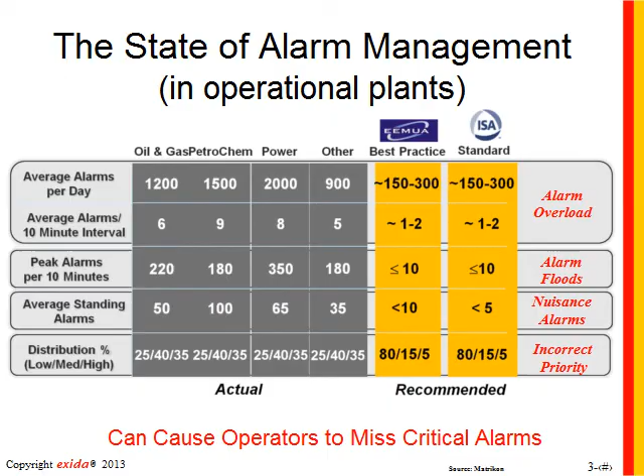And of course, with all of these problems in play, it can lead to operators missing critical alarms, which can result in unplanned downtime, damage to equipment, people being hurt, off-spec product, and in worst cases, accidents. We really do believe that alarm management and process safety go hand in hand. One of the purposes of the alarm system is to help keep the plant and personnel safe, in addition to helping you optimize the process.

Alarms are typically one of the first layers of protection - the alarm and the operator response to the alarm - used in conjunction with a safety instrumented system and with other IPLs, passive IPLs. One of the things that has been found through investigation of some of the worst case process safety accidents, things that have been in the news for a long time recently and in the far past, is that poor alarm management was a common theme and a significant contributor in each of these process safety accidents.

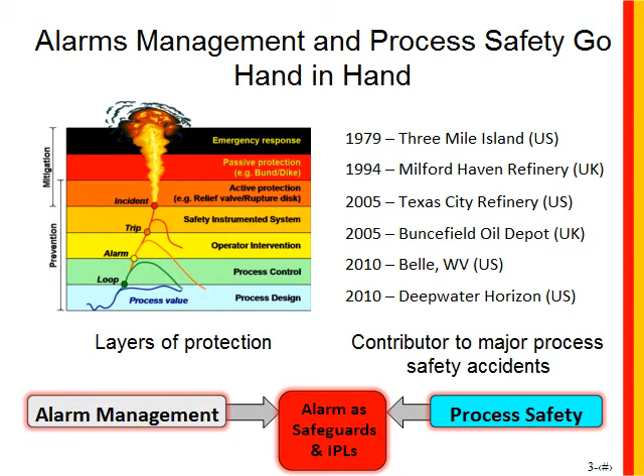So we really do think that alarm management and process safety work together, and that becomes particularly true when we talk about alarms that are part of the safety design - that is, alarms identified as safeguards in a HAZOP or a PHA, and alarms identified as independent protection layers in a layer of protection analysis.

So let's take a look at one of those accidents that was listed and see how alarm management played a part in it. Deepwater Horizon is something that probably everyone, or I would hope everyone, is familiar with - most familiar with the element related to the spilling of oil from the Macondo well blowout in the Gulf of Mexico.

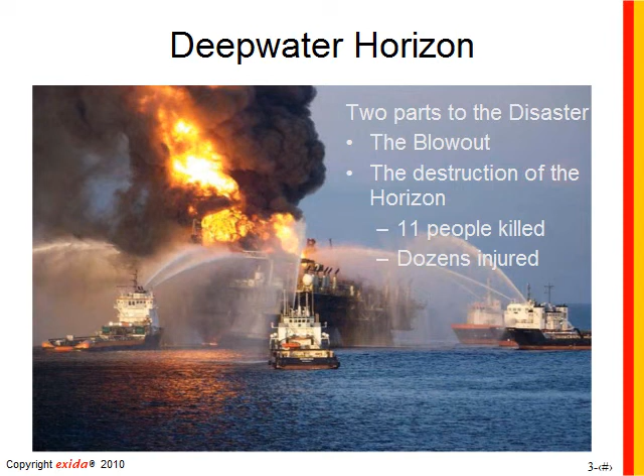What's probably not quite as well known is what happened to the platform itself, the destruction of the Horizon platform, and the causes of what went behind the design there, and why 11 people lost their lives and multiple other people were injured. So let's take a look at the design of the alarm system on the Horizon.

There were numerous tens of sensors placed all around the platform with the design intent that if any one of them detected the presence of gas or fire, it would alarm in the places where people were: 3 different places, the bridge, the drill shack, and the engine control room. It would also automatically sound a really loud horn to tell everyone that they needed to evacuate the rig. That was the design, the intent of the alarm system design there.

But the way it was actually implemented was different. They were concerned about false alarms or nuisance alarms in the middle of the night, waking people up and telling them to evacuate when they didn't really need to. So with that concern, they decided to disable or inhibit some of the alarm annunciation, putting the decision about whether to hit the evacuation horn into the hands of the bridge operator. If the sensors detected gas or fire, the alarm would only go off to the bridge operator, and it was up to them to decide whether the evacuation horn should be pressed.

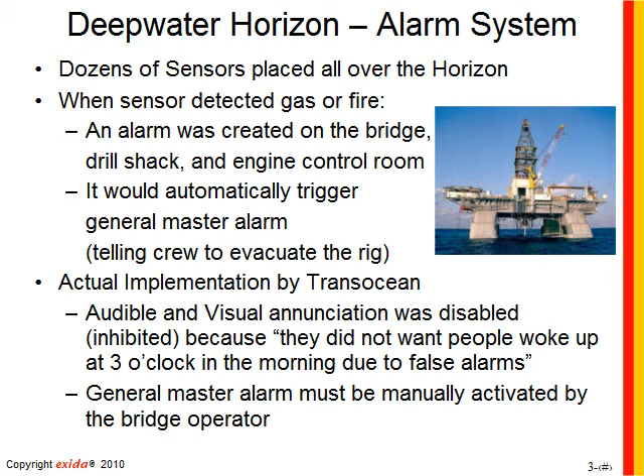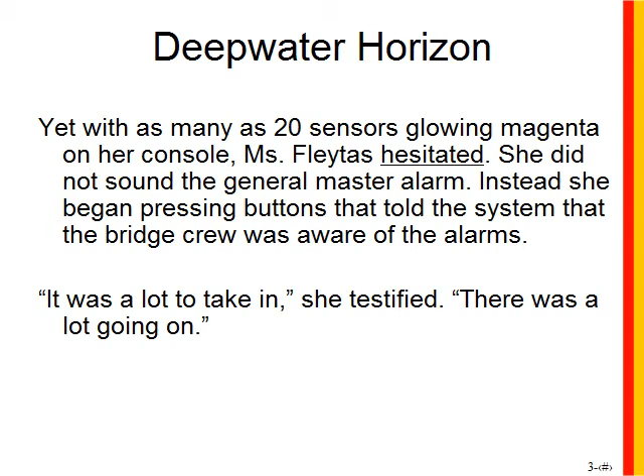Now you can read for yourself information that comes from the testimony before U.S. Congress. This was the actual operator that was on the console at the time, and you can see that she was somewhat overwhelmed by all of the alarms coming in at once, not knowing what to do. She wasn't there by herself, though. She was also joined by her supervisor, who also was having difficulty understanding what to do. The alarm annunciation was making it difficult. The overload of alarms was making it difficult for them to think and determine a course of action.

And of course, remember, it was up to the bridge operators to make the decision about whether to sound the evacuation horn. Unfortunately, there was a delay of about 10 minutes between when the sensors first detected the gas and fire to when that evacuation horn went off. I have to believe that contributed to the number of people that lost their lives or were injured in that accident. So directly, the effect of poor alarm management.

So how did we get into this situation with too many alarms, alarm overload, people not knowing how to respond when they get hit with so many alarms? If we think back to the olden days in panel board control rooms, there was actually limited real estate, limited room for alarms. So maybe for a given unit, you might get 200 alarms. That was all there was space for. So the engineers designing the alarm system had to pick the best 200 alarms. They had to do their due diligence because they only got 200 alarms. So they really had to optimize and trade off and think about what the purpose of each alarm was and what the operator was going to do.

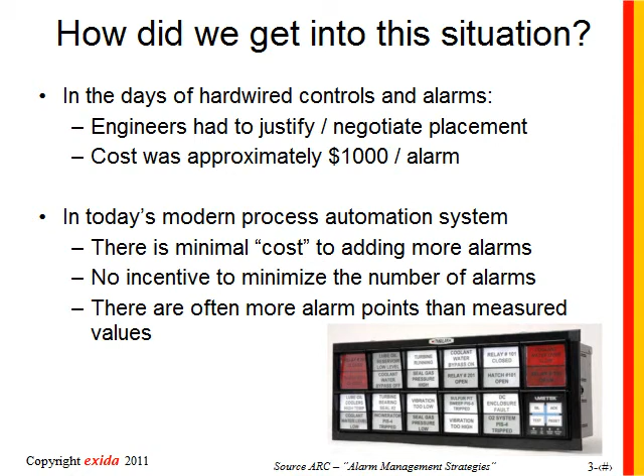So one of the things we want to do is get back to the thought process we used to use, where we thought about whether the alarm was really needed, what its purpose was, what the operator was to do. That's a process called alarm rationalization, which we'll talk about some during this webinar.

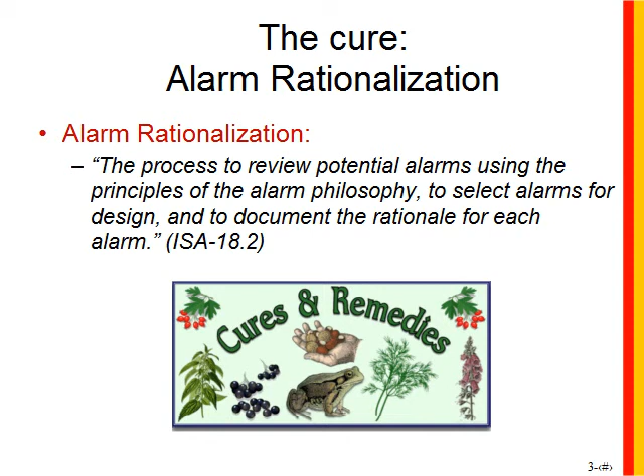So you're essentially starting up a system without a well-designed or well-thought-out alarm system. No wonder operators get inundated with alarms. If the system hasn't received any rationalization before starting up, that's exactly what would happen.

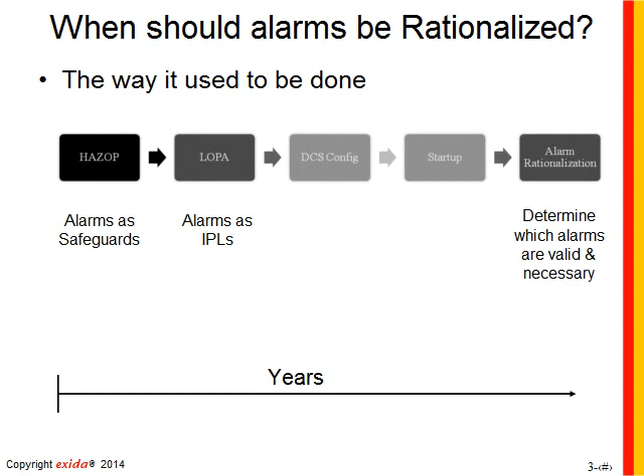One of the questions I wanted to ask as a poll is, how often have you found that an alarm which was identified as an IPL was not valid or ineffective? The idea being that since alarms are identified as safeguards and IPLs early in the project and not rationalized till after the system has been running for a while, it's possible that when you finally get around to rationalization, you might find that some alarms identified as safeguards or IPLs don't work or don't provide the risk reduction. So how often in your experience have you seen that happen?

We're getting a few responses. Give another couple of seconds. As soon as the results have flattened out, I'll make it so you can see them now.

You can see over 65% of the respondents said that sometimes or frequently they find an alarm that's an IPL turns out to be not valid or ineffective. Part of the reason that occurs is because of that huge time discontinuity we just saw. So one of the things we want to talk about for rationalization of greenfields is how to prevent that.

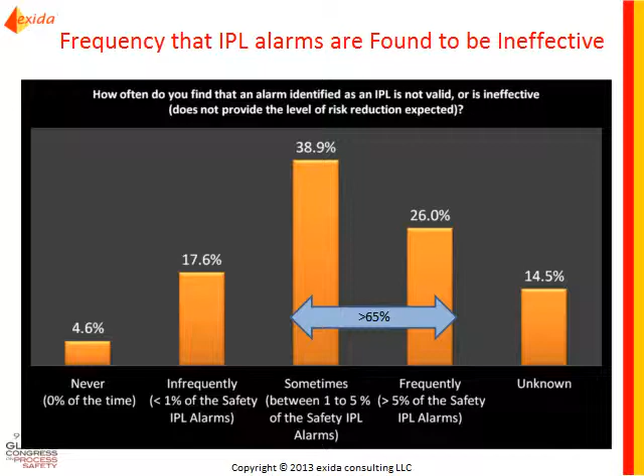What does that mean? If you're counting on your alarms to be part of your risk reduction strategy, the fact that they're not working or not pulling their weight in terms of risk reduction means you'll need to make up that loss by increasing or adding other IPLs, or increasing effectiveness, like your safety instrumented system, changing it from a SIL 1 maybe to a SIL 2, which of course has cost impact, maintenance and testing impact.

That's if you realize and know that's happening. If you don't realize your alarms aren't doing what they're supposed to from a risk reduction point of view, you may actually be operating with an actual risk greater than your tolerable risk, which would not be a good thing. That's part of what we want to discuss and address.

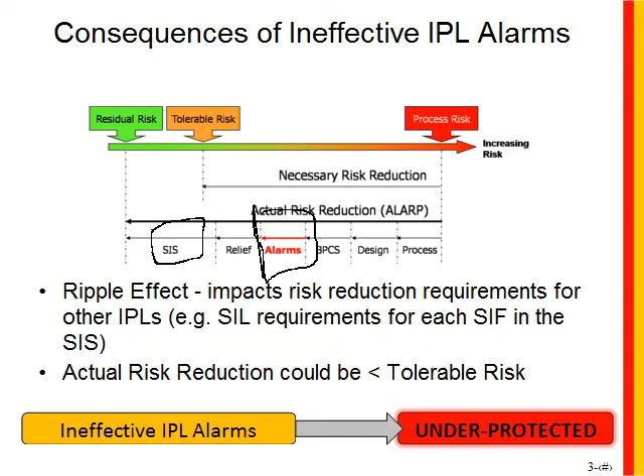So if the typical time to rationalize alarms is months or years after the system has been up and running, and operators are complaining about alarm system performance, and if that doesn't work, how should we do it differently? What could be different? Well, the end users of today have gotten smart to that situation and said, we no longer think it's acceptable to start up a system without the alarm system being rationalized.

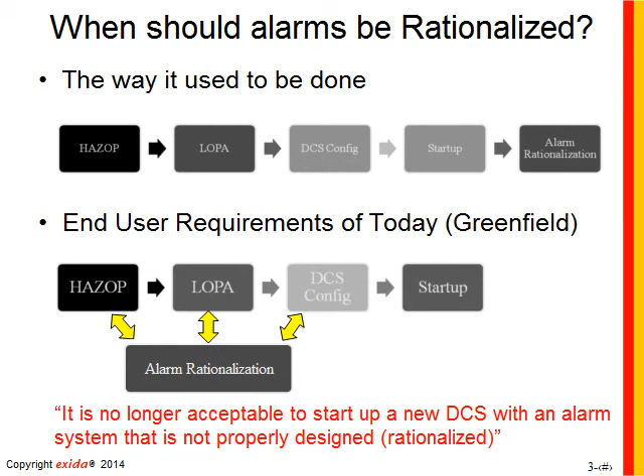Without the alarm system being configured appropriately, rationalization has to take place before startup, likely in parallel or in iteration with your HAZOPs, your LOPAs, and your DCS configuration. So that's part of what we want to talk about.

Where should the information come from regarding what we do for alarm management practice and principles? There's two main sources of information for that. There's the EEMUA 191 guideline that was created originally in 1999 in response to an accident in the UK. It just came out in its third edition in September 2013. And then there's also the ISA 18.2 standard created in the US in June of 2009.

This is actually a true auditable standard with requirements and recommendations that you clearly need to look at and address how you're going to comply with, because OSHA deems this document as recommended and generally accepted good engineering practice. So it's RAGAGEP - that means they expect you to follow this as good engineering practice. If they were to audit you and you're not following the standard, you could be in line for some fines or action.

This document was also given to the IEC, the International Standards Creation Board, to become an international standard, and it's on track for that to happen sometime later this year or next year, with the idea that the international version of the alarm management standard will be largely based on the original ISA 18.2 standard. One of the things that standard defines is an alarm management life cycle or workflow process.

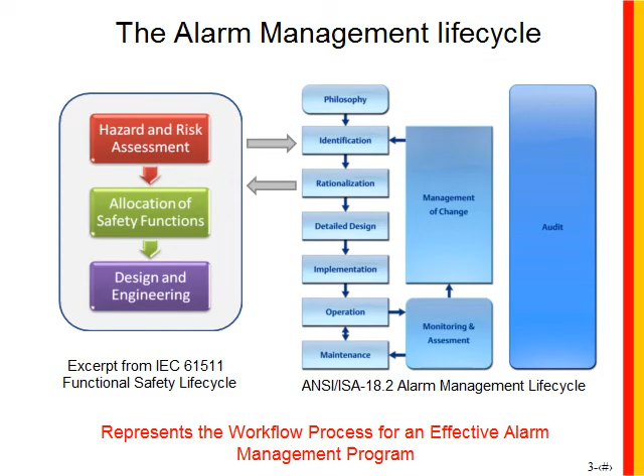If you're familiar with the functional safety life cycle from the 61511 standard, this will be familiar to you. Different stages talk about the activities and requirements of what you need to do. In the case of alarms that are safeguards or IPLs, they're actually part of both life cycles - part of the safety life cycle in hazard and risk assessment and allocation of safety functions, and part of the alarm management life cycle. You can see the connectivity there. But the alarm management life cycle primarily lays out a workflow.

So now I wanted to get your assessment on where your company is in the adoption or use of alarm management standards like ISA 18.2. Is it something you haven't done much with, you're aware of but have taken no action yet? Some actions have been taken but maybe not coordinated in a comprehensive plan, or you do have a comprehensive program in place, or perhaps this is not applicable to you. Take a second and think about what your answer would be, and then I'll share that with the group.

Okay, hopefully you can see the results now. The most popular answer was that some actions have been taken, so that's a good sign. We have a few people that said they were not aware of the standard or have not taken any action, so maybe that's a follow-up item from this webinar to start to get more familiar with that. I noticed that nobody said they have a comprehensive program in place. That's understandable - when standards like this come out, they're not put in place and users and vendors don't achieve full compliance with it overnight. It certainly takes a period of time. So the adoption process is a gradual curve, and hopefully what we're seeing here is the start of increased adoption.

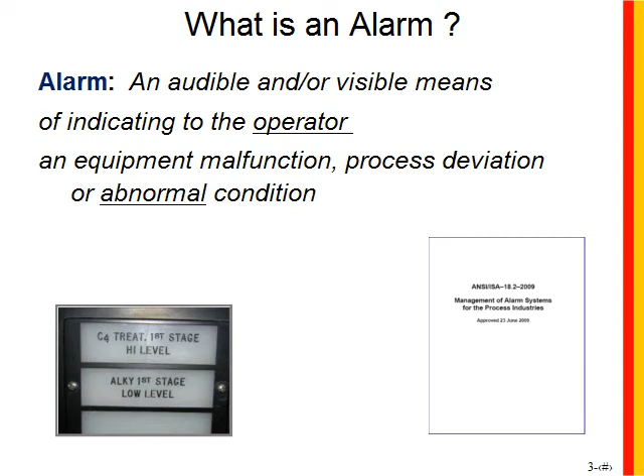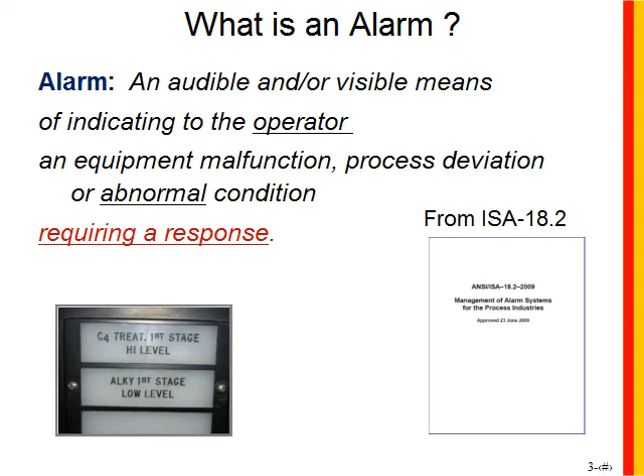Also, an alarm needs to indicate an equipment malfunction, process deviation, or abnormal condition - essentially that something is wrong, something unexpected has occurred. And then last but not least, it requires a response from the operator, more than just acknowledging the alarm or silencing the horn - something designed to address the abnormal situation, like turning on a backup pump or opening a valve.

Other key design principles: as part of rationalization, we actually want to define what the operator is supposed to do, and we'll use that as criteria for determining whether it's a valid alarm or not. We also want to make sure there's enough time for the operator to respond - not too much, not too little - and that any time an alarm is presented to the operator, it's useful and relevant.

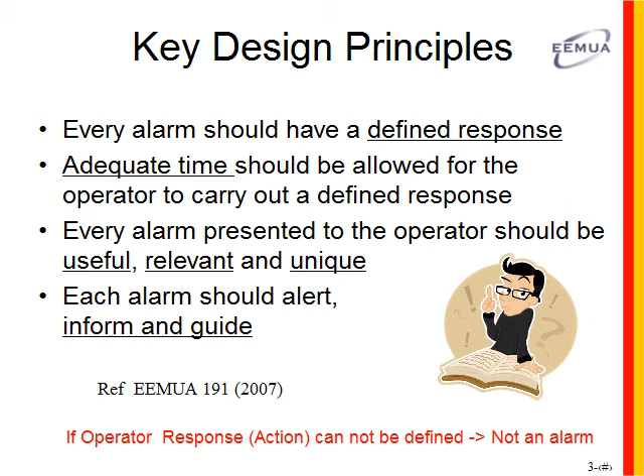So, for example, when equipment is out of service, many times the alarms coming from that piece of equipment are no longer valid to the operator, so the ability to suppress them or not present them when they're not actionable is very important. We also want to make sure that when an upset occurs, the operator doesn't get 10 alarms that all basically indicate the same thing - we strive for uniqueness. One upset, one alarm. You only need one alarm to know that something has happened and to indicate what you need to do.

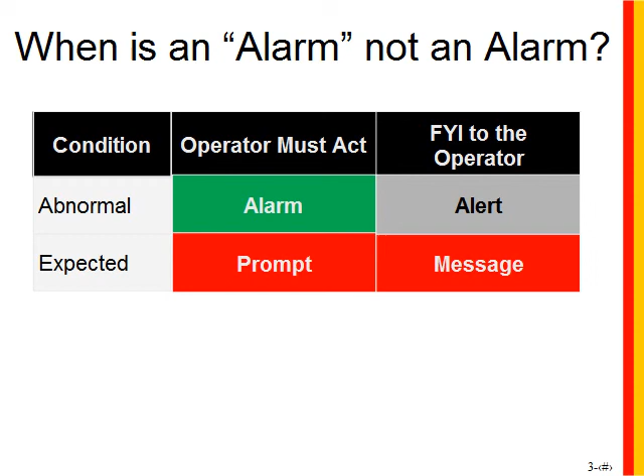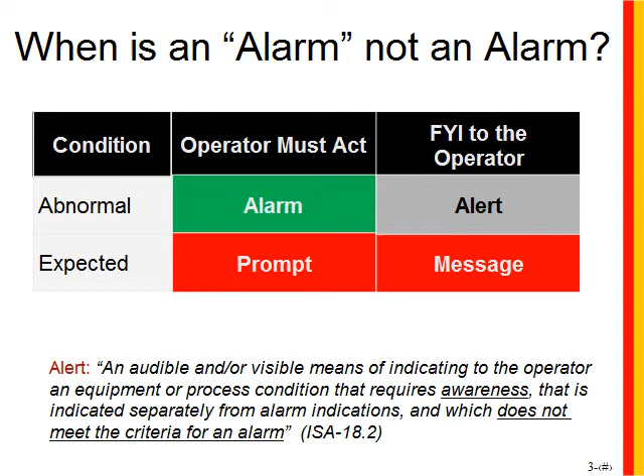So one of the problems and causes of why alarm systems are overloaded is, in a lot of cases, it contains other stuff besides true alarms. And if you look at this little matrix, it's a good way to identify what a true alarm is - it should be an abnormal condition and one where the operator must take action. Probably if you have an unrationalized system, you have a lot of other types of notifications in there - maybe it's an abnormal condition but the operator doesn't need to respond, or maybe it's an expected condition. Well, all those kinds of things, while they might be valid and useful for the operator to see, don't belong in the alarm system. They really should be segregated out and presented to the operator in a different way.

Now, we talked about an operator response. Well, what makes this response successful? If we think about what they need to do, first they need to detect the presence of the alarm.

If the HMI has lots of flashy colors and graphics and a bunch of nuisance alarms already blinking, it may be very difficult for operators to detect the presence of a new alarm.

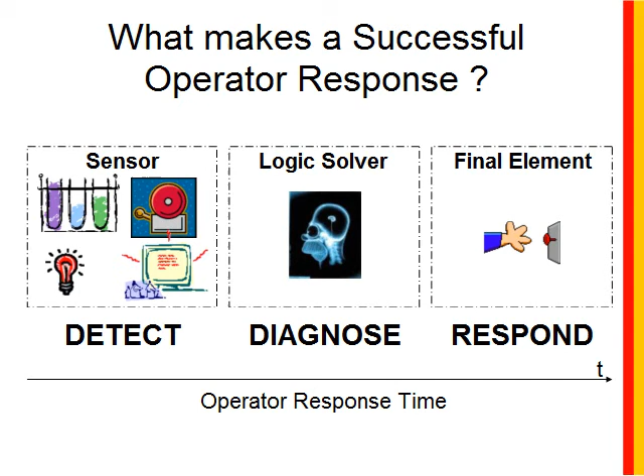They also need to diagnose or figure out what the problem is and then perform the appropriate corrective action, which could be going out into the field, calling a different operator to go do something, walk out into the field and grab a wrench and do something locally. This could take a significant amount of time, on the order of minutes. We'll look at that as the operator response time.

Now, if you put yourself in the shoes of the operator, if you were a new operator working a shift and an alarm occurred, what would you want to know? What information could help you do your job better?

If there was a way to present an alarm response procedure: what has caused the alarm? What do you need to do in response to it? What's going to happen if you don't respond? How much time do you have to respond? And how do you confirm that the alarm is real?

Presenting that kind of information in context when the alarm occurs would certainly help the operator's performance in terms of timeliness and consistency. So the next poll question is: does your company make these alarm response procedures available to the operator? And if so, in what format?

Hopefully you can all see the survey results, quite across the board. 25% say no, they don't make alarm response procedures available to the operator, and there's a variety in the different formats, with 16% saying they're integrated into the actual HMI, which is probably the best scenario, or the best that you can do.

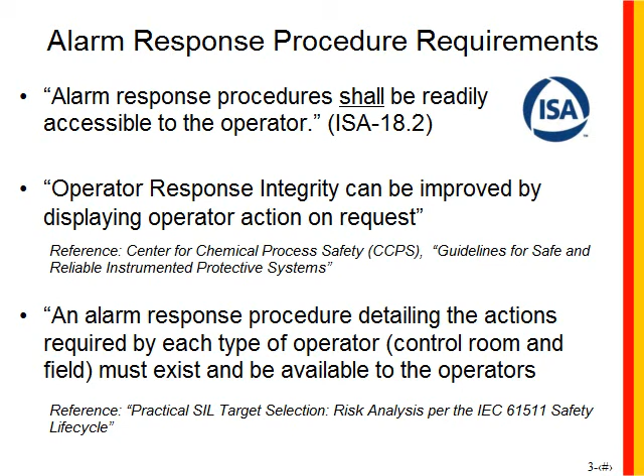You can also see the impact that having an alarm response procedure has on the safety element of using an alarm. So if you're counting on it to provide risk reduction, then certainly the presentation of an alarm response procedure can help increase the reliability of the operator's response.

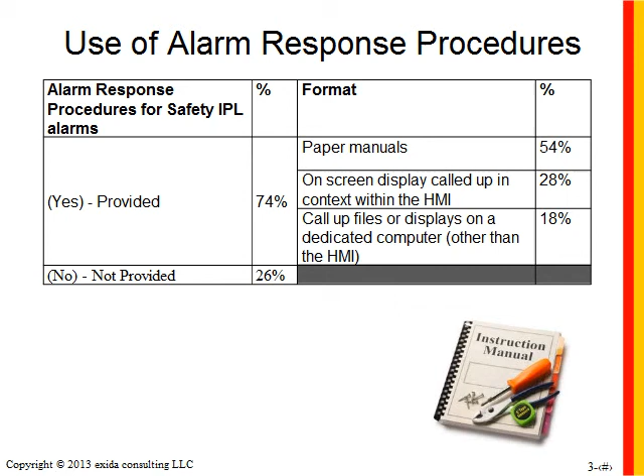Here's the results when that more detailed survey was conducted a year ago. About three-quarters of the people said that they do provide alarm response procedures. Of that fraction, the majority were paper manuals, which certainly achieves compliance with the standard, but in terms of making it as effective as possible for the operator, we can probably do better if we take the information and make it appear in context electronically, either within the HMI or some other way, making it so the operator can quickly know what to do.

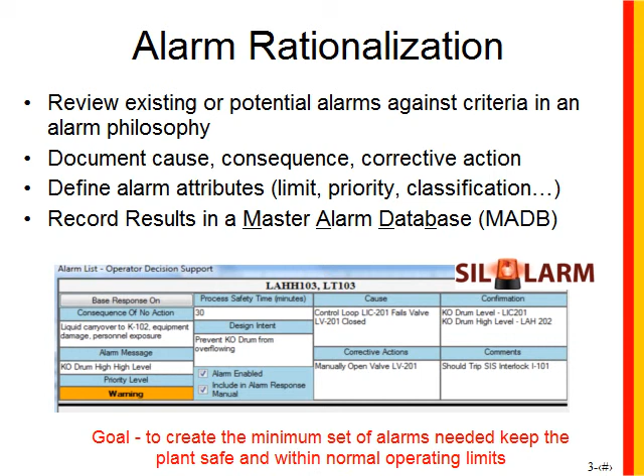Now let's briefly go through the rationalization process, and then we'll see how it all applies to a greenfield project. Rationalization is when we review the existing or potential alarms, make sure they meet the criteria for being an alarm, including documenting their cause and consequence, corrective action, assigning priorities and limits, and recording the information in a master alarm database.

One of the first things you can do to determine whether the alarm is valid or not is a series of, I'll call them, go/no-go questions. Number one, does the alarm indicate a malfunction, deviation, or abnormal condition? Two, does it require a timely operator action in order to avoid defined consequences? Is it unique? Is it the best indicator? Ideally, you want to answer yes to all four of those for each alarm you're looking at, or else it's not a valid alarm.

Part of the reason we go through this is to think about whether you can ask these questions or consider these topics any time you identify an alarm, such as during a HAZOP or when considering an alarm during a layer of protection analysis. If this is part of the criteria you use to determine it's a valid alarm during rationalization, in a lot of cases it might make sense to ask these questions earlier in the process, earlier in the design, at the point someone nominates the potential alarm.

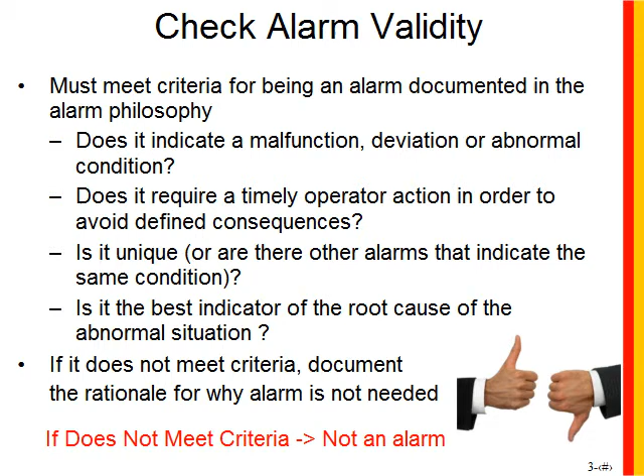As part of rationalization, we also document the objective of the alarm: what is the likely cause, making sure it's an unexpected situation, and what the likely consequences are if the operator doesn't respond to it.

We also want to document what the operator is to do, the corrective action. If we can't define a corrective action, the point really shouldn't be an alarm. Ideally, we also document how they can confirm the alarm is valid, either by looking at other process measurements or a local sight gauge, to help verify that if the corrective action is to press the emergency shutdown button, they in fact do need to do that, and to help corroborate that's the action they need to take.

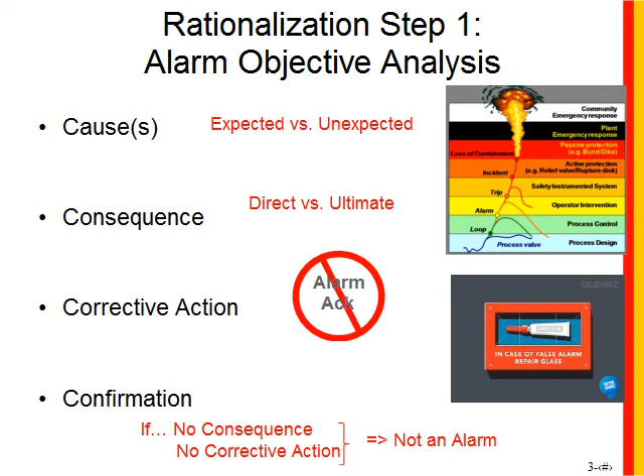So we document those four things, and based on the analysis, that helps us know whether the alarm is even valid or not. We document those results in the master alarm database. Here's an example using the exida SILAlarm rationalization tool as your master alarm database, documenting the cause, consequence, and corrective action.

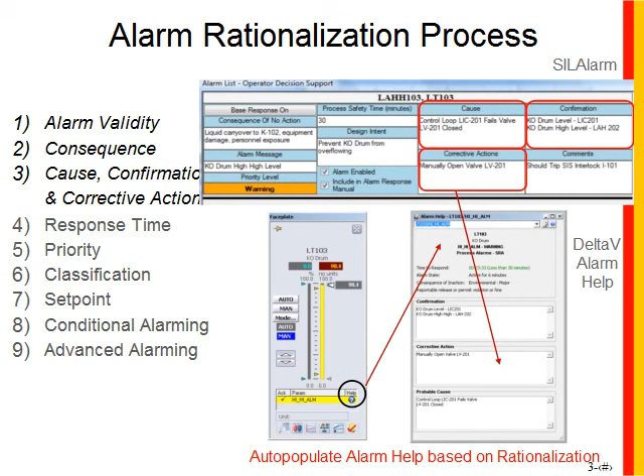That same information would be ideal to present to the operator in an alarm response procedure. So what we advocate is, if you go through this rationalization process and document this element of the alarm design, when you're done, you can take that information and turn it into an alarm response procedure with minimal additional work. Here we're showing an example of an integrated alarm response in a DeltaV system, a faceplate called Alarm Help, accessible from the tag's faceplate or the alarm summary list, where the displayed information can actually come from rationalization, helping the operator know how to respond to that alarm.

Another key part of rationalization is defining the alarm's priority. Priority is what the operator uses to know which alarm to respond to first when there are multiple alarms. If you work in a plant that never has more than one alarm active at a time, good for you—you probably don't need this webinar. But for most of us, that's not the case, so we need a way for the operator to know which alarm is most critical, or how to evaluate what's more critical than another.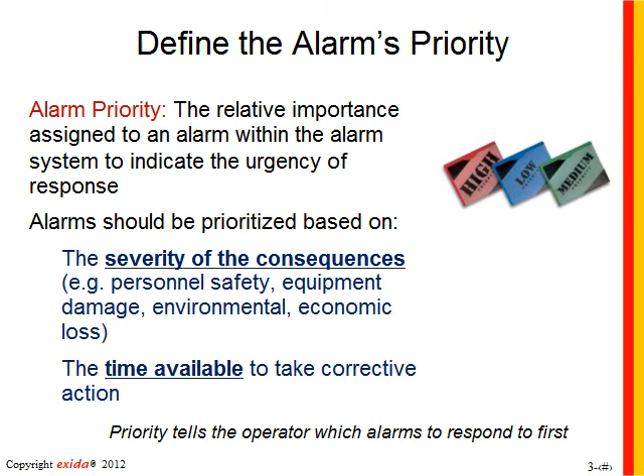The recommended way is to evaluate the severity of the consequences in different predefined areas and assess the amount of time available for the operator to respond, typically assessed in a matrix like this. We define different consequence areas, such as personnel, environmental, and financial, then assess how much time the operator has to respond, take the worst-case consequence, and combine that with the response time to get the alarm's priority.

One thing that makes sense, if possible, is that this consequence matrix looks a lot like the structure of a risk matrix in a PHA. If you have a risk matrix, it's great to reuse all or some of it as part of creating this alarm prioritization matrix, as a means of driving consistency in your evaluation. In some cases the risk matrix is too exaggerated to work for alarms, but it's definitely worth looking at to keep your risk evaluations consistent.

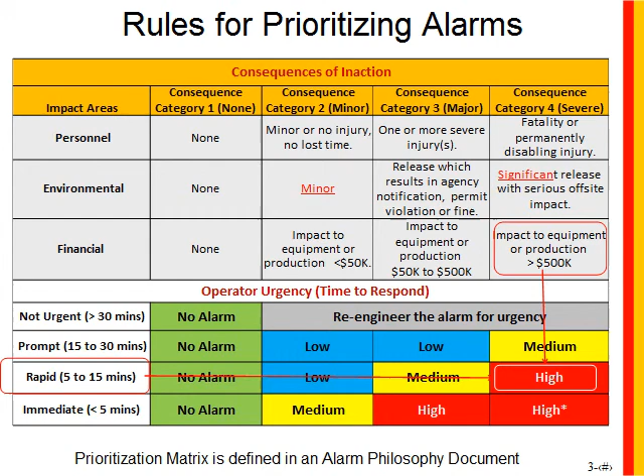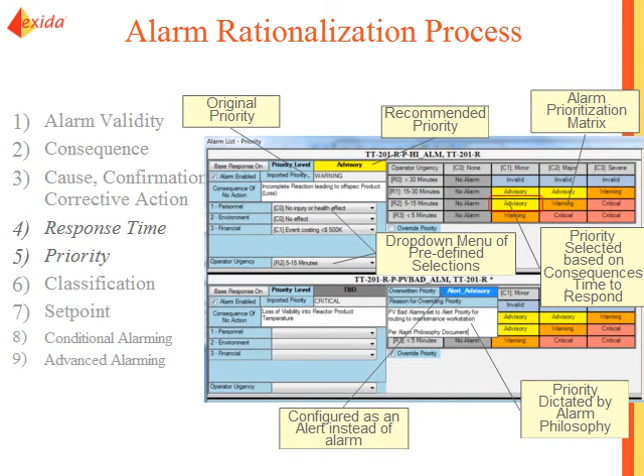Within the SILAlarm tool, we can automatically calculate the alarm priority based on our assignment and assessment of those consequences and time to respond. Or we could determine that the point really isn't an alarm at all—it's one of those other types of operator notifications, like an alert or a prompt. So we could indicate that the point is not really an alarm; it might be valid information for the operator, but doesn't belong in the alarm system.

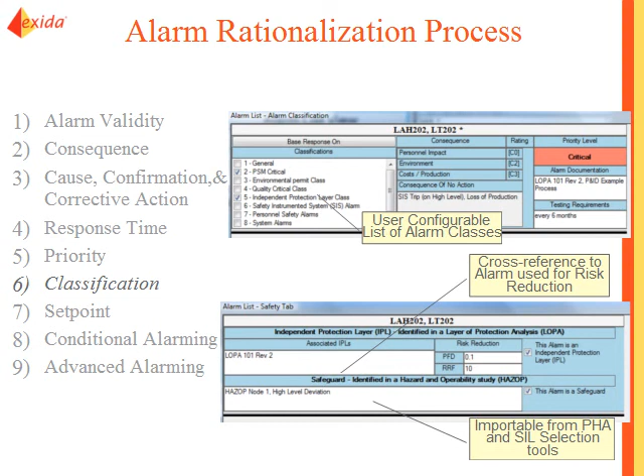We can also classify the alarm, assigning it to classifications. What's really important, especially early in a project or design process, is indicating whether the alarm comes from a HAZOP report or analysis, multiple HAZOPs, or a layer of protection analysis—indicating where it comes from. This lets us create a cross-reference of where that alarm is referenced or used in the safety design, so if we need to see how an alarm design change affects the safety design of the plant, we can easily do that.

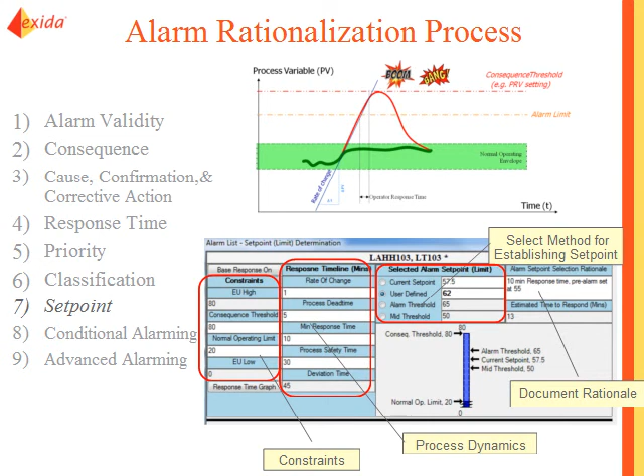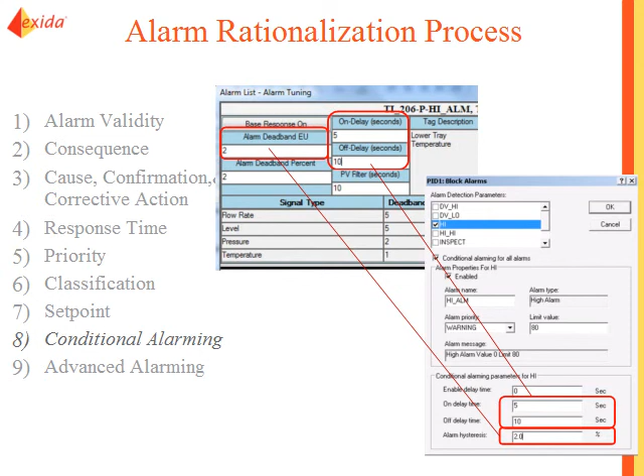During rationalization, we review and assess the alarm limit, looking at the process dynamics and the consequences we're trying to prevent. We can also enter information for the deadband, setting it appropriately or using on-off delays to help reduce chattering and minimize the chance that it turns into a chattering alarm.

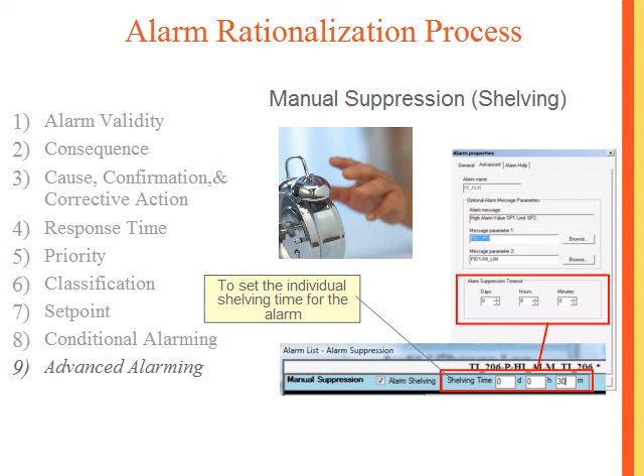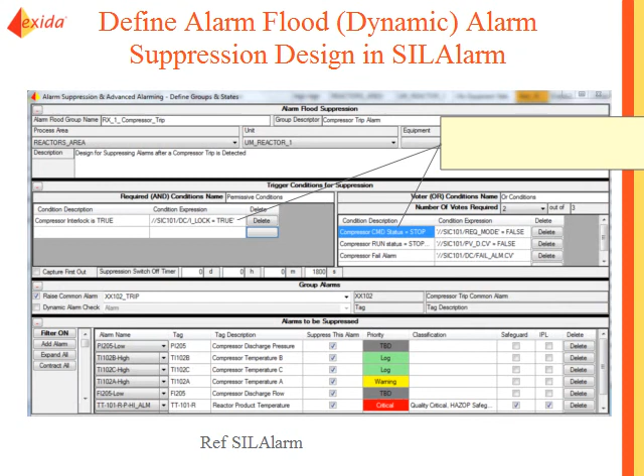If the system supports manual suppression or shelving by the operator, we can configure that information. And we can also define if there are scenarios where the alarm needs to be suppressed or needs a different limit or priority.

In this case, we're showing suppression of alarms following a compressor trip. First, we define the conditions we would look for to know for sure that the compressor has tripped. Then we create the list of alarms that we think could be or should be suppressed in that scenario. We can define a common alarm to present instead of the multitude of alarms.

We can also check to make sure it's okay to suppress the alarms by looking at their priority or classification, or whether they're a safeguard or an IPL. Certainly, if they're a safeguard or an IPL, you want to think harder about whether it's acceptable to suppress the alarm, and make sure that the hazard the alarm is there to prevent doesn't still exist in this state or scenario.

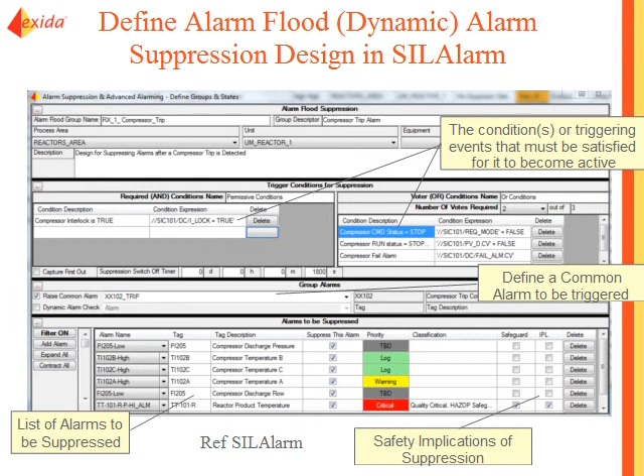Because if it does, then it wouldn't be acceptable to suppress the alarm. Or you may find there's a different hazard, and the alarm still needs to be there to prevent this new, different hazard that makes itself apparent during this unique state of the plant.

So if we look at how we would do rationalization in this new methodology of ensuring that rationalization occurs before startup of the plant, we don't want to delay startup for months and months. That means rationalization needs to go on in parallel with the HAZOP and the LOPA and the configuration of the DCS, and it would also probably be iterative between those to some degree.

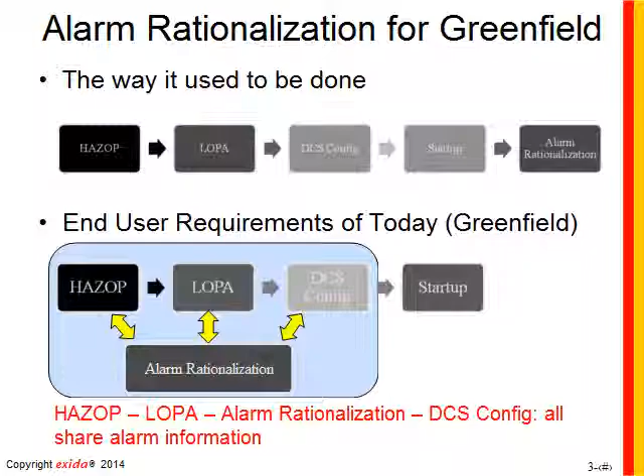So let's look at how that works, or the key things there. We're going to start with design information that we'll use and bring into the master alarm database for rationalization. And the input could come from multiple sources.

It could be from your P&IDs, it could be from your HAZOPs. We'll get some relevant information from there. If you have a safe operating limit table, for example, that would be relevant information to bring into this master alarm database.

But we want to aggregate and collect all that information so it's readily available when we conduct rationalization, with the idea that when we're done, we have an output of information that can be used to configure the DCS, to specify how it needs to work, an Excel spreadsheet of the settings, or the creation of alarm response procedures.

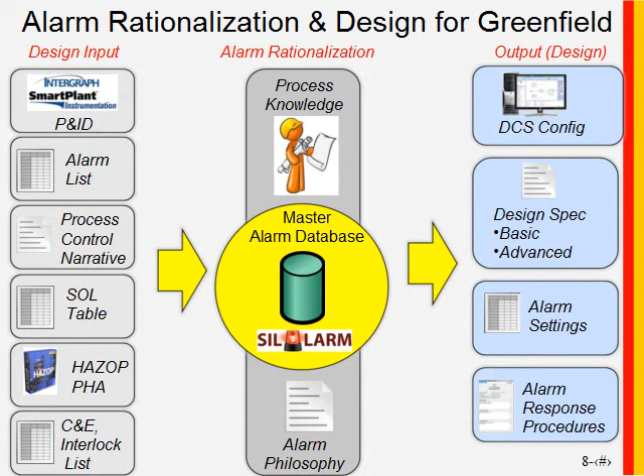So that's the methodology of how this would work for a Greenfield scenario. And when doing the rationalization, instead of looking at all the existing alarm conditions that maybe are already in the DCS, we're instead focusing on what are the undesirable situations that we want to prevent in this unit or with this piece of equipment.

And that'll dictate what alarms we need, what alarms we need to be able to sense that, and what alarms we need to prevent that undesirable situation or consequence from occurring. So we're not going to say, oh, we need a high flow and a low flow alarm just because we're measuring flow.

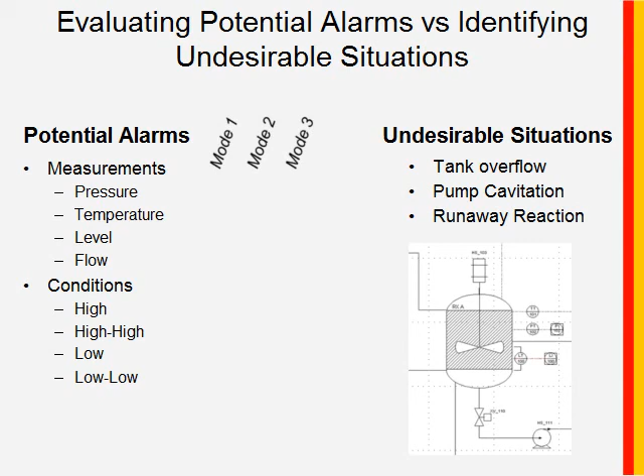No, the idea is to step back and apply a HAZOP-type mentality, and think about what you're really trying to prevent, and what alarms we need to make that happen. So for example, here's a HAZOP that calls for the need of a couple of alarms.

Now, hopefully one takeaway, if you're involved in PHAs, HAZOPs and LOPAs, is that now that you understand a bit more about the alarm rationalization process and what it takes for something to be a valid alarm, you can actually apply some of that thinking at the moment you specify the need for the alarm.

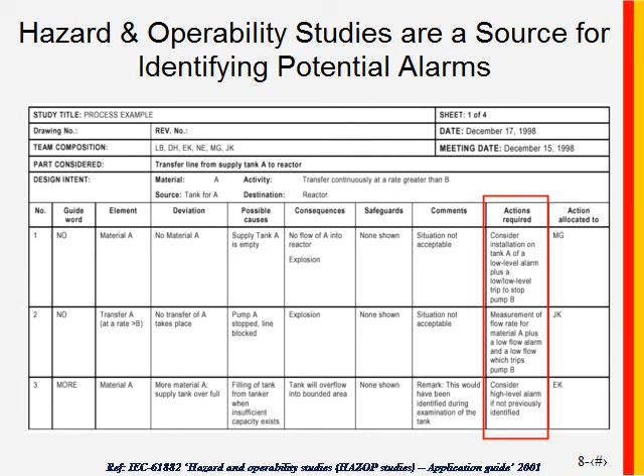This would certainly help to make sure that later on down the line you don't find out that the alarm you added to your HAZOP or LOPA is not valid and you need to redesign your risk reduction.

So one way to actually make that happen, and to capture that information I just talked about, is with the tools you're working with to document your PHAs. In the exida PHAx tool, there's the ability provided to document some of the alarm rationalization information.

So anytime you indicate that you have an alarm as a safeguard, you can also document what the operator's corrective action would be, how much time you think they have to respond, and what the actual consequence would be if the operator didn't respond. That's a lot of information you'd need for rationalization, and since you likely have the right people in the room, it makes sense to document some of that information.

I'm not suggesting that you do a rationalization at the same time. That's a bit more work than what's necessary or called for, and would certainly take your PHA off track. But I think some nominal documentation of what the alarm's purpose is would be very beneficial.

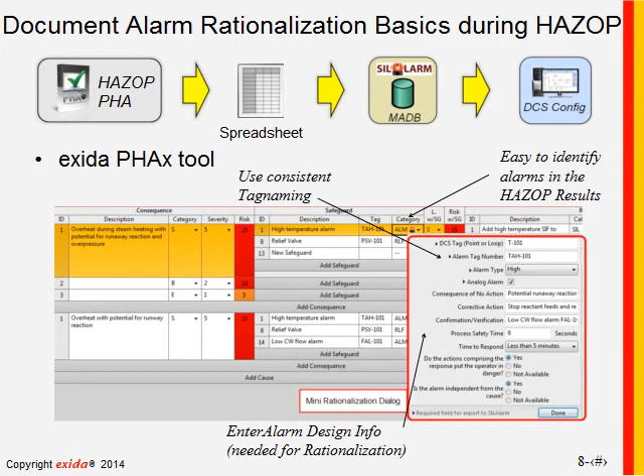Now, when it comes to documenting or defining the consequence, this can be very tricky for people that do both PHAs and alarm rationalization. In a PHA, you're concerned with trying to identify the ultimate consequence - what could happen if every layer of protection fails?

In alarm management, we want to identify what happens directly and immediately if the operator doesn't respond. So in this scenario, the consequence for alarm rationalization, if the operator does not respond to the alarm, is the trip of the safety instrumented system. The consequence in the PHA would be this explosion or fire or whatever it is.

So that means that in this case, the way the layers of protection are designed, the operator's response to the alarm is not the last layer of protection, which is good - that's what we'd want. We need to factor that in when identifying what the consequence is, because we're going to use that mitigated consequence when we calculate what the priority should be.

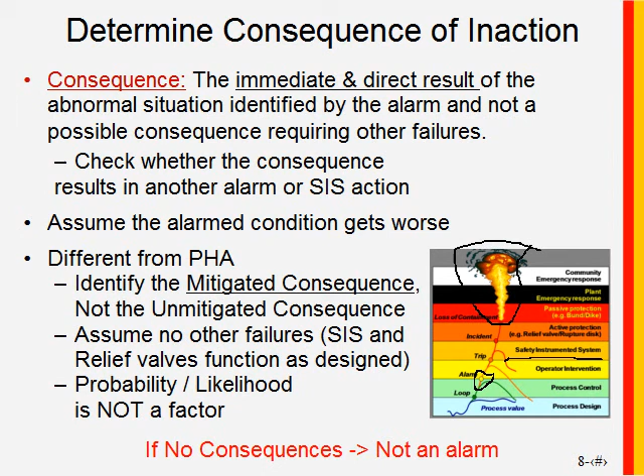We also want to assign how much time the operator has to respond and think about how that's applied during your HAZOP and your LOPA, with the idea that when we talk about operator response time, what we really mean is how much time is available for the operator to respond. That's the time from the activation of the alarm until the last moment that operator action will prevent the consequence. So we want to make sure, since time can show up in HAZOP, LOPA, and rationalization, that we're using the same definition of what time is.

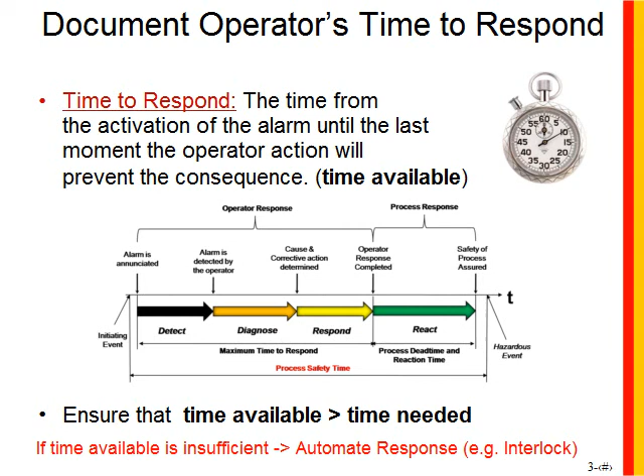Now, certainly if there's insufficient time available compared to the time needed, that means the alarm would not be valid or is not going to work. You can't take it as a layer of protection, and you shouldn't take it as a safeguard - you need to actually automate the response somehow, maybe by an interlock.

So one of the things that is typically done is, if you're going to take alarms as an independent protection layer, you define the criteria for how much time the operator must have at a minimum to respond to the alarm to be able to take that as a layer of protection.

The reason you do that is if you're assuming a risk reduction of 10, a probability of failure on demand of 0.1, that means you're counting on at least 90% reliability or 90% probability that the operator is going to respond successfully, even during this upset scenario when probably this alarm would occur. One of the ways you can help make sure he can deliver that level of reliability is to make sure they have enough time to respond to the alarm.

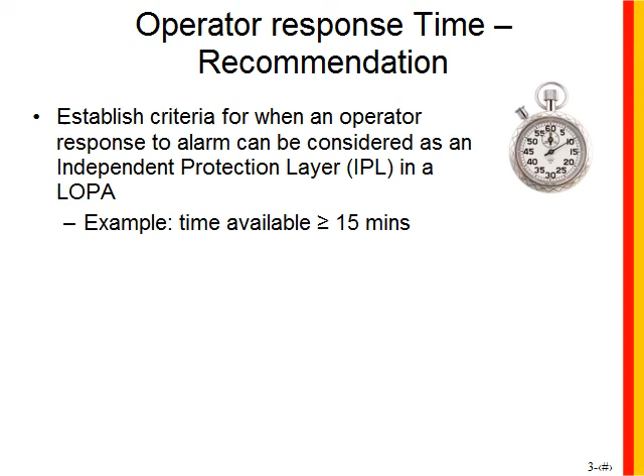In addition, make sure that you have alarm response procedures for them as well. But judicious defining of what the operator response time is for your IPL criteria can also be incorporated into when you're doing your alarm prioritization.

If you set your priority time buckets with the knowledge of what the criteria is for an independent protection layer, we can say, for example, since 15 minutes to 30 minutes is one of the thresholds, that if we're going through rationalization, one of the outcomes is we will know that any alarm that had a time to respond of less than 5, or 5 to 15, would not be a candidate to be an IPL unless there was some redesign done.

So smart connection of the priority matrix to an understanding of what the time criteria is for IPL definition will make it so one of the outputs of rationalization is those alarms that are candidates to become an IPL.

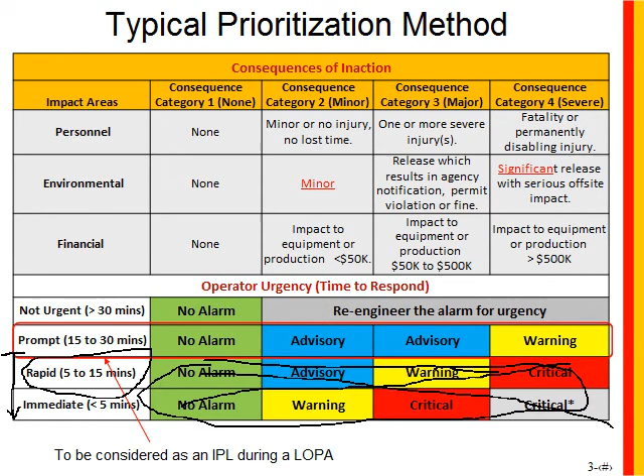As mentioned earlier, it's also a best practice to record, if the alarm is identified in a HAZOP or an LOPA, where it comes from, so that there's coordination and traceability to changes from both sides.

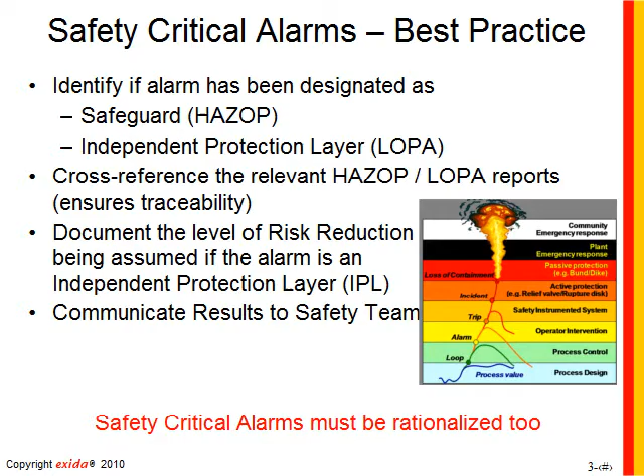When you set the alarm limit, you're typically trying to set it based on what you know about the normal operating envelope, which you may not know in a Greenfield scenario. So it can be a little bit trickier to set the alarm limit.

But if you set the alarm limit in relation to what you're trying to prevent, that is the consequence, you may still be able to establish valid alarm limits even early in your process by looking at your pressure relief valve settings. So if this was a pressure measurement, and the next layer of protection after the alarm was a relief valve, if we knew the pressure setting for that, we could use it as the reference point in setting the alarm limit.

So if we know our design limits, our safe operating limits, our maximum design pressures and temperatures, that can go a long way to help us define what the alarm limit should be.

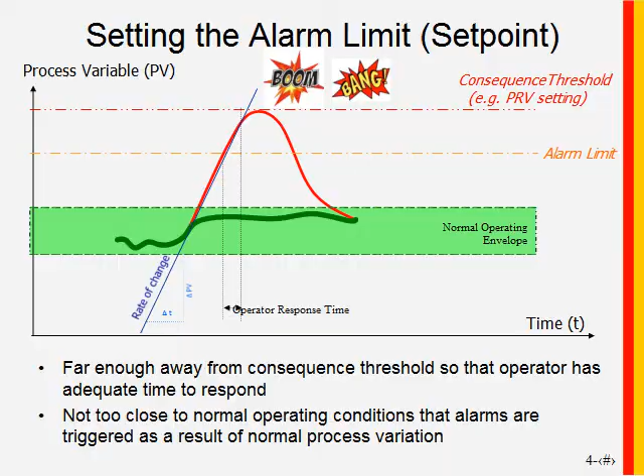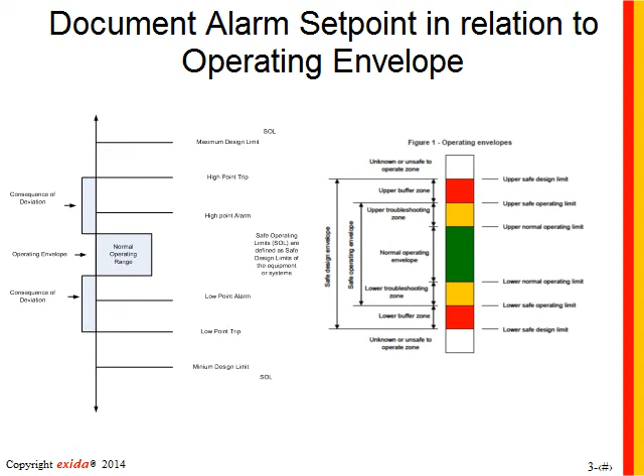Understanding and documenting the alarm limit and its relation to those operating constraints, that process safety information, is definitely a good idea, because then you can see how, if that information changes over time, which it always does to some degree, you can see the need to adjust your alarm limits.

Looking at an ideal Greenfield scenario, we can execute the alarm rationalization in parallel using input from the plant design process, the P&IDs, the HAZOP work, safe operating limits, and process narratives. We can use that to drive the creation of the master alarm database and the rationalization done in parallel with the configuration of the DCS.

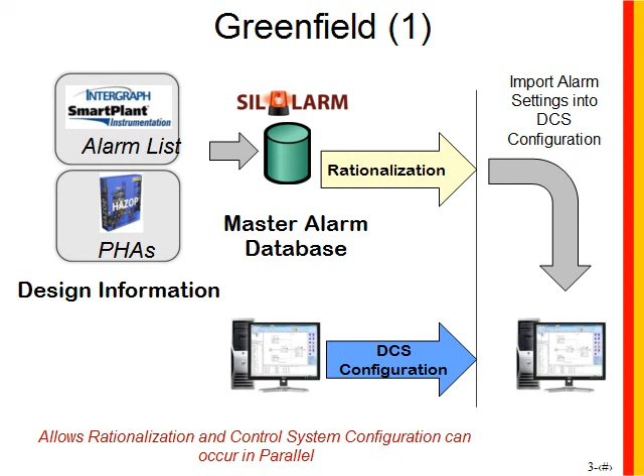So that when you get to a certain point in the project, you can match those two databases together and bring all the alarm settings from the rationalization tool into the DCS configuration and update the alarm settings, allowing those two tasks to be done effectively in parallel.

Early in the design of a project, the inputs that go into establishing what the limit should be, and what the cause and consequence are, a lot of that is going to change along the way. So you have to be able to identify and track those changes, particularly as they impact the alarm design.

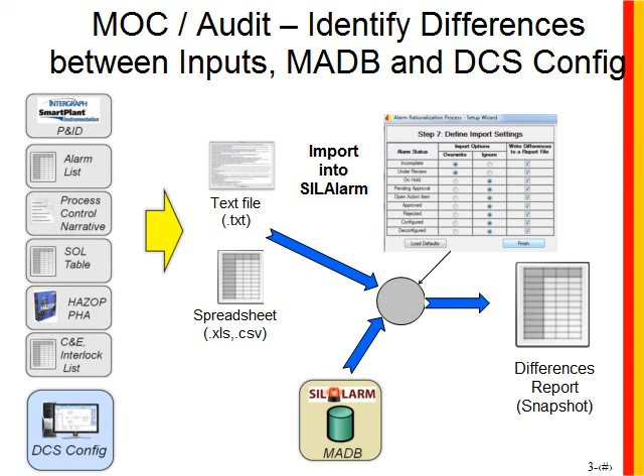So one of the things to look for in a tool is the ability to track those changes, not just from the DCS configuration, which in this case is actually an output of rationalization, but the inputs that go into it, like your P&ID program or your safe operating limits in a spreadsheet. We're happy to say that the SILAlarm tool allows you to capture changes from any of those databases.

Summarizing, or coming to some conclusions, when you're defining alarms, you want to make sure that you're thoroughly documenting the tag name.

One of the things you often see is that the alarm and tag names used up front in the P&IDs or HAZOPs are not very precise, or are not the actual tag number that ends up in the DCS configuration in the control system, which is what the rationalization database is probably going to need to use. So understanding that and thoroughly documenting what you know will help somebody else be able to use that information.

So we definitely want to pay attention to our tag naming conventions, because if you're doing a PHA or a HAZOP and identifying an alarm, you need to count on the fact that the alarm management team is going to need that information and integrate it into their work.

The more you can do to accurately assign what tag or what alarm that belongs to, the better. Because if you just say it's the tank high level alarm, that's going to create a lot of extra work when the alarm management team has to go off and figure out what ID tag that actually is.

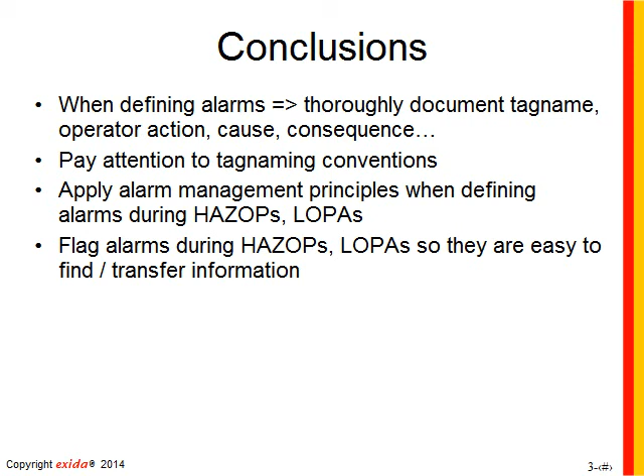Different tools have different ways to set up flags to uniquely identify alarms. But again, thinking that somebody else is going to have to use that information and put it into their work process, make sure you make it easy for them.

Hopefully we've seen that if you follow these best practices and conventions and the information is available, it is possible to execute an effective alarm rationalization up front in the design of the plant and the process. You don't have to wait until after the system is up and running.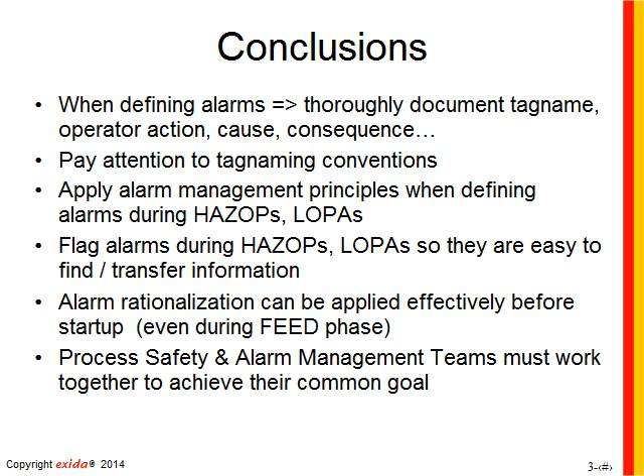You can do it in the FEED phase or other early design process. The final takeaway is that for the process safety and alarm management teams, they really need to work together when it comes to effective design of alarms used for safety purposes. Getting to know more about how the other party uses the information and how it goes back and forth can help each of us do a better job of defining it in a way that's easier for that other party to use. So certainly think about that.

One of the things that's been added to the CFSE program is an endorsement program, a series of specialties you can learn more about and demonstrate that you're an expert in, to show competence. For alarm management, if you're a CFSE or CFSP interested in learning more about the topic and demonstrating mastery, we have this endorsement program for alarm management, which has a training class, a study guide, sample questions, and an online exam with 40 questions to help validate that you understand the concepts of alarm management.

If you want any additional information on that, go to either the exida website or the CFSE website, which would probably be the best one for that.